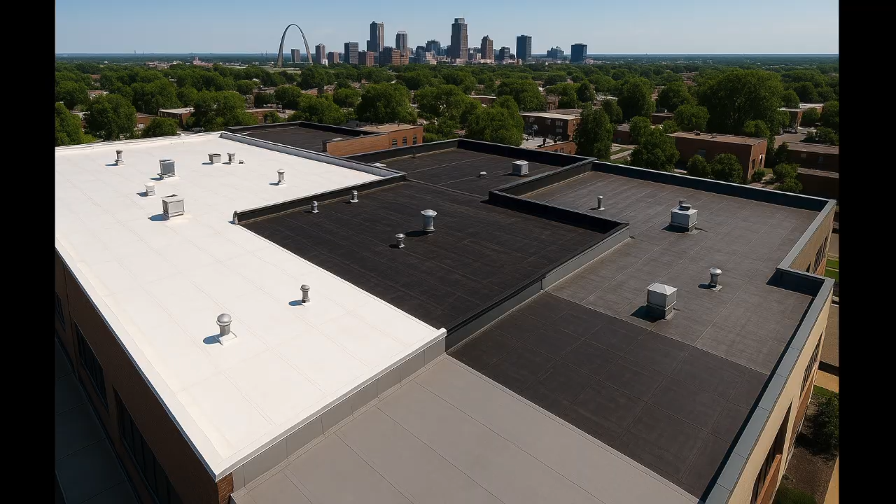Welcome to the Flat Roof Systems training session. In this video, we'll cover everything you need to know to confidently discuss low-slope roofing systems with your clients, from the materials and installation methods to the insulation, accessories, and building code requirements specific to the St. Louis area.

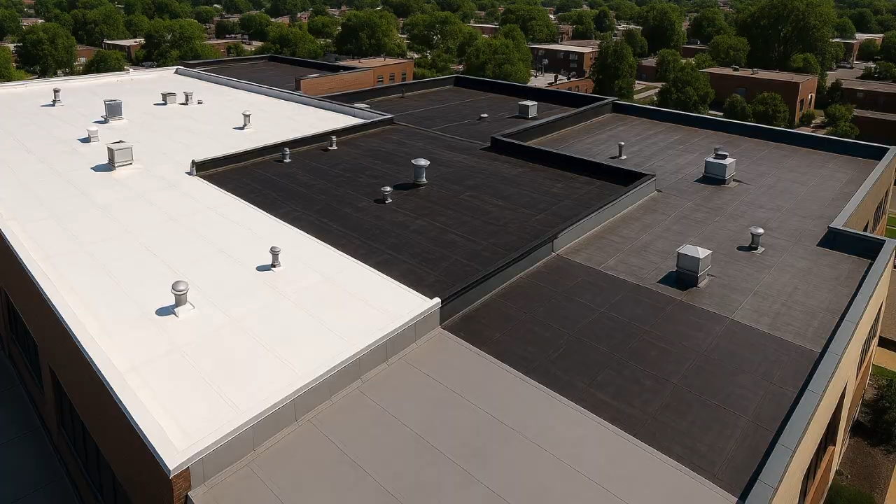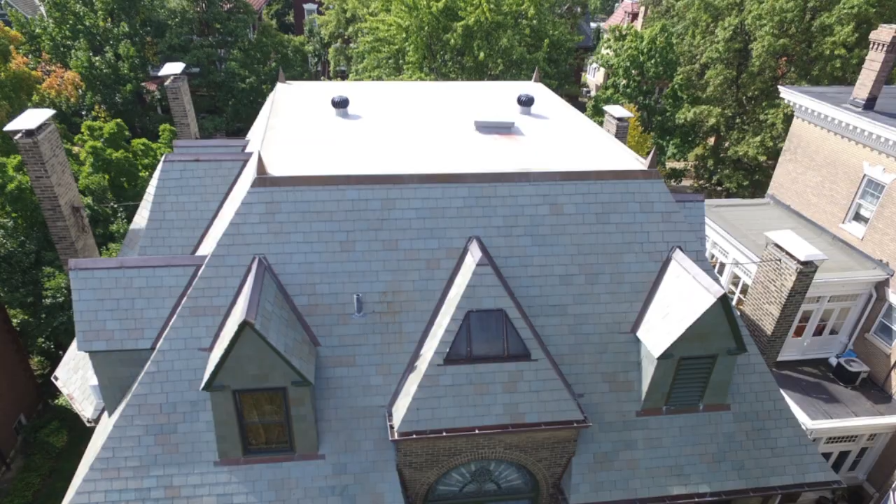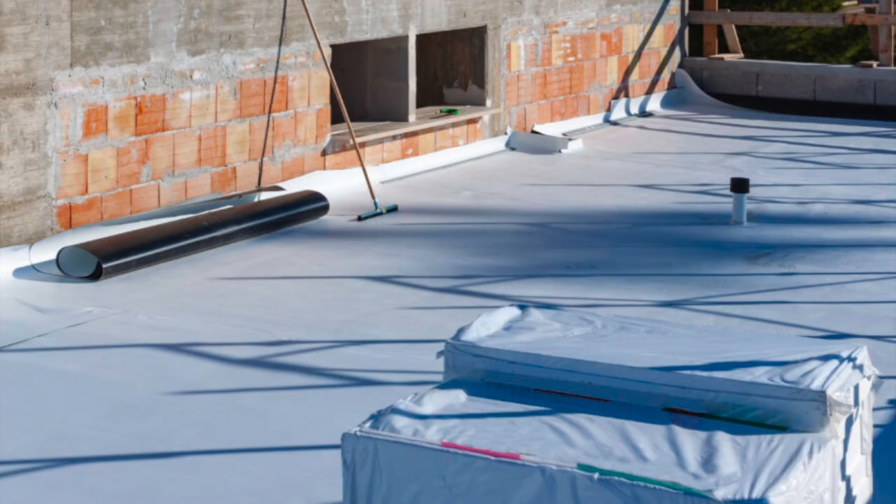Thermoplastic polyolefin, TPO, is one of the most popular commercial flat roofing systems in the St. Louis area. It's a single-ply, white reflective membrane that's energy efficient and helps reduce cooling costs during hot Midwest summers. TPO roofing offers several advantages for property owners in Missouri. It is highly UV resistant, meaning it can withstand prolonged exposure to sunlight without degrading, which helps extend the life of the roof. The material is flexible, allowing it to expand and contract with temperature changes, and it is highly reflective, reducing heat absorption and helping lower cooling costs during hot summer months.

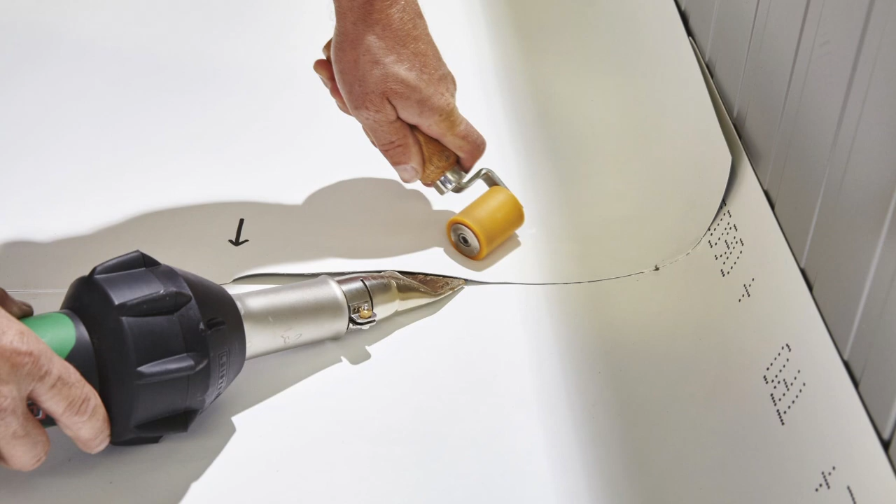However, TPO does have some potential drawbacks. If it is not properly welded or maintained, the membrane can shrink or split over time, particularly during the freeze-thaw cycles common in Missouri's climate. Regular inspections and quality installation are essential to avoid these issues and ensure the system's long-term performance.

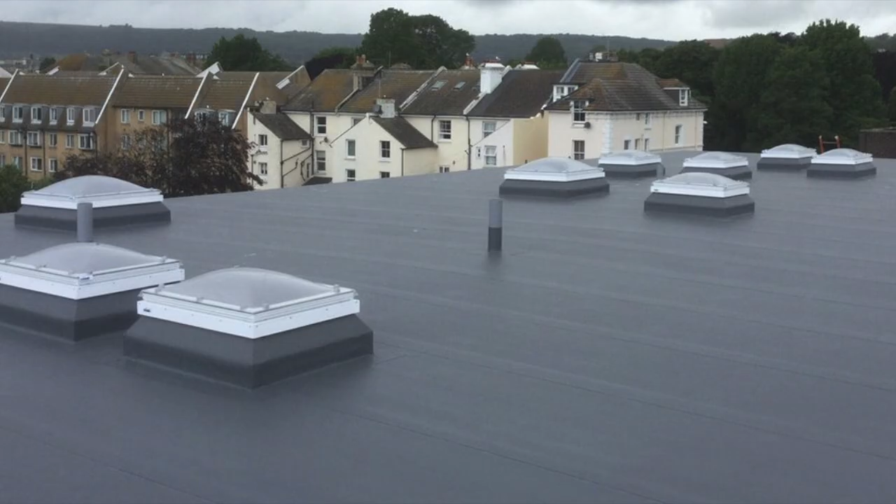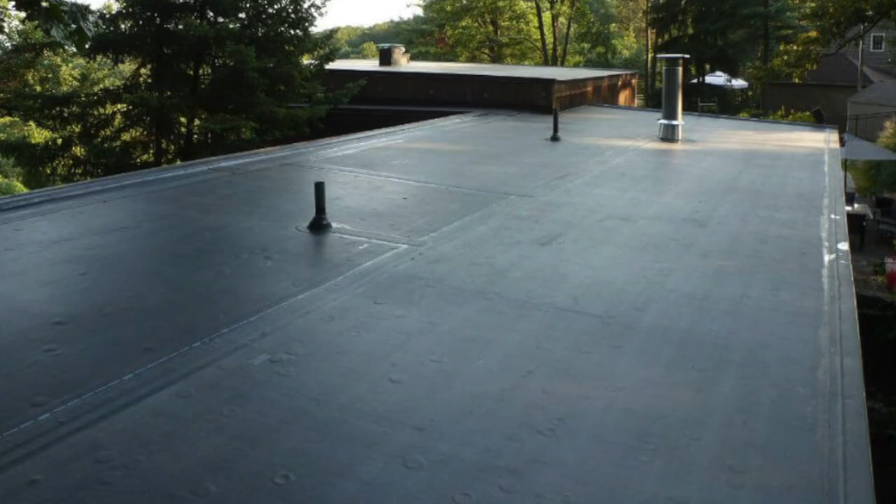EPDM is a black rubber membrane known for its durability and flexibility. It performs well in St. Louis' wide seasonal temperature swings. EPDM roofing is known for its exceptional resistance to UV radiation and ozone, making it one of the most durable and weather-tolerant flat roof materials on the market. Its rubber composition provides excellent long-term waterproofing, ensuring dependable protection against leaks and moisture intrusion for many years.

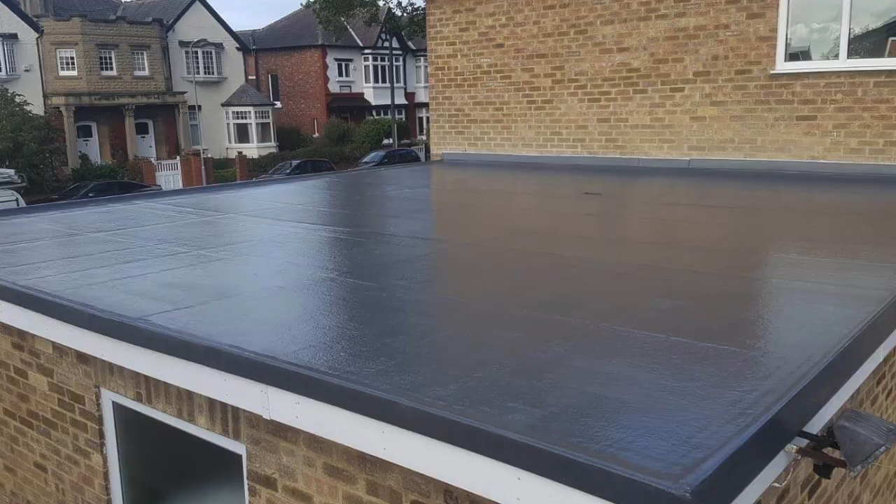However, because EPDM is typically dark in color, it tends to absorb more heat from the sun. This can increase indoor temperatures and raise cooling costs during warmer months, especially in regions like Missouri with hot summers. To counteract this, many installers recommend using reflective coatings or ballast systems to improve energy efficiency and reduce heat absorption.

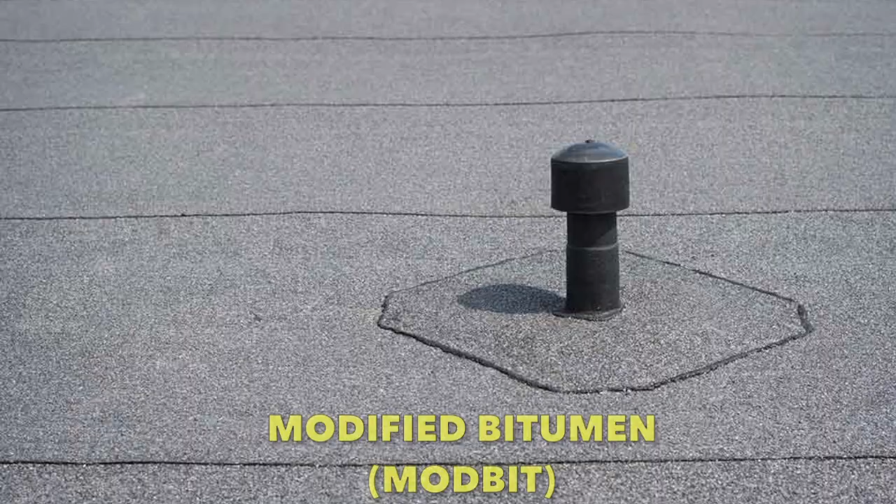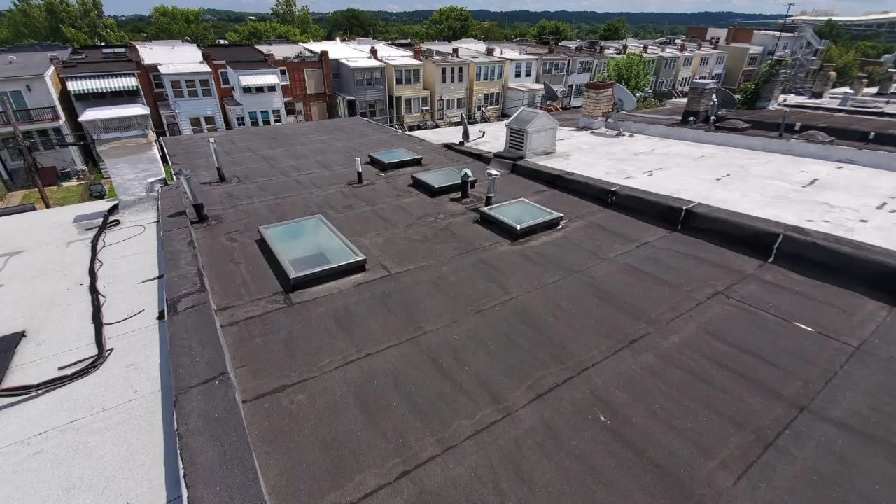Modified bitumen is a time-tested roofing system made up of two primary layers, a base sheet and a cap sheet. It can be installed using torch-down, cold adhesive, or self-adhered methods. Modified bitumen roofing is extremely durable and highly puncture-resistant, making it an excellent choice for smaller commercial buildings and residential low-slope roofs. Its multi-layer design provides exceptional strength and flexibility, helping it withstand foot traffic, hail, and seasonal temperature changes.

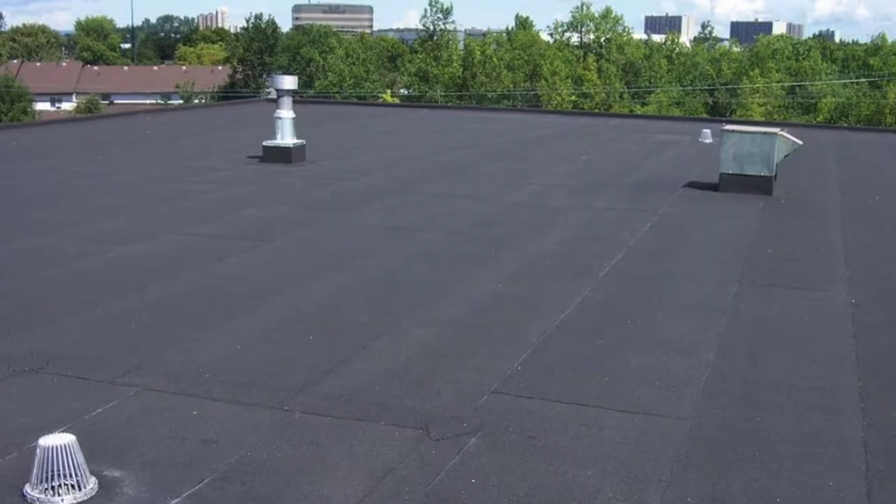However, installation can be labor-intensive, often requiring skilled crews and more time on site compared to single-ply systems. In the case of torch-down applications, the process also demands strict fire safety precautions to protect both workers and the property, which adds to the overall complexity of the installation.

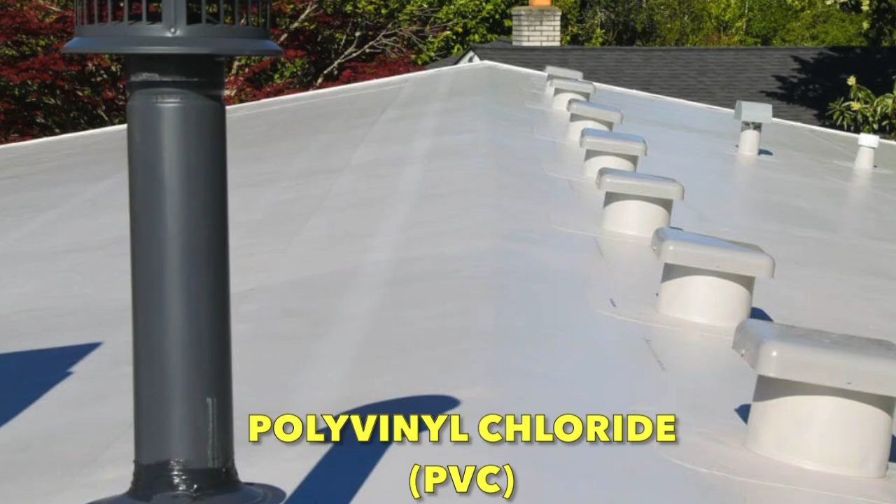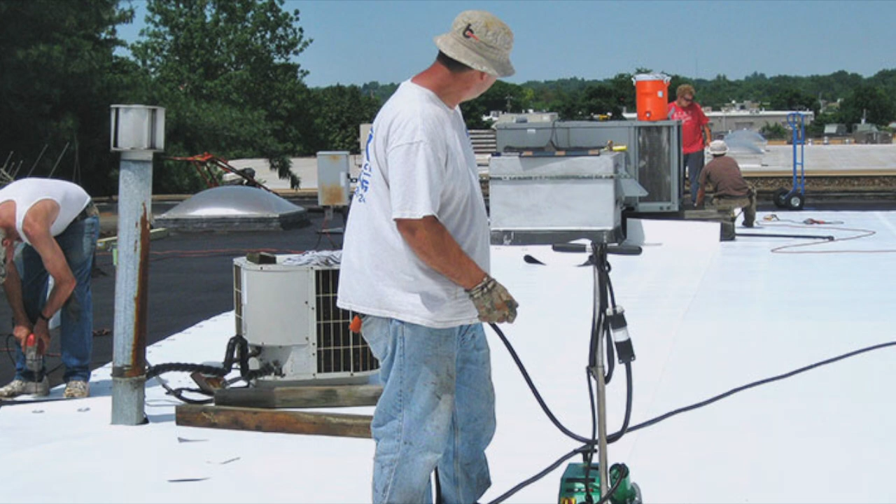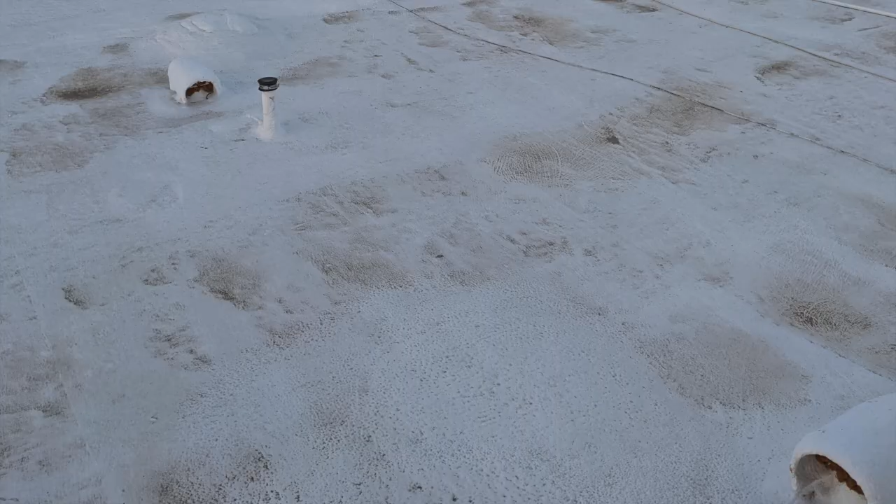Polyvinyl chloride, PVC roofs are similar to TPO but offer greater chemical resistance, perfect for restaurants, factories, or buildings where grease or chemical exposure may occur. Its excellent weldability allows installers to create strong, watertight seams that enhance long-term performance and leak protection. While PVC offers outstanding durability and energy efficiency, it can become brittle with age, especially after long-term exposure to extreme temperatures. Additionally, it tends to be more expensive upfront than TPO or EPDM systems, though its longevity and chemical resistance often justify the higher initial investment.

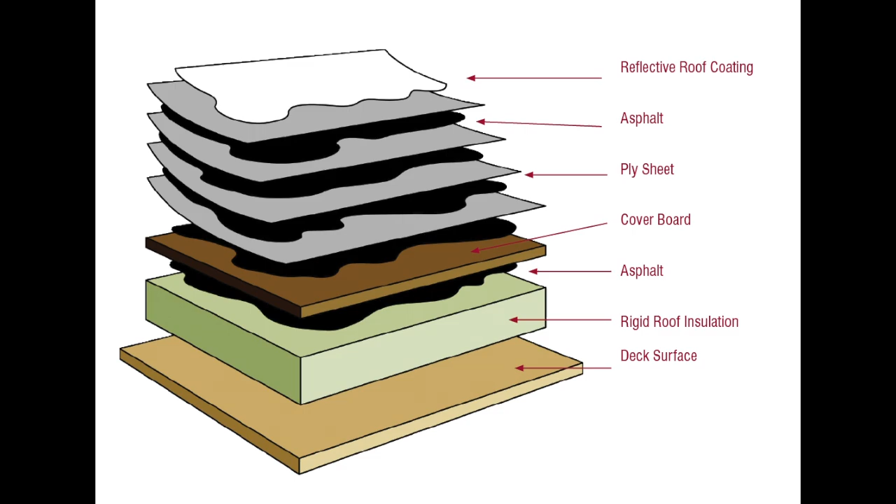The traditional built-up roof uses multiple layers of asphalt and felt, topped with gravel or reflective coatings. Built-up roofing, BUR, systems provide excellent multi-layer protection that delivers long-lasting waterproofing and superior durability. Their layered design makes them highly resistant to foot traffic, making them ideal for commercial buildings that require frequent rooftop access for maintenance or equipment servicing.

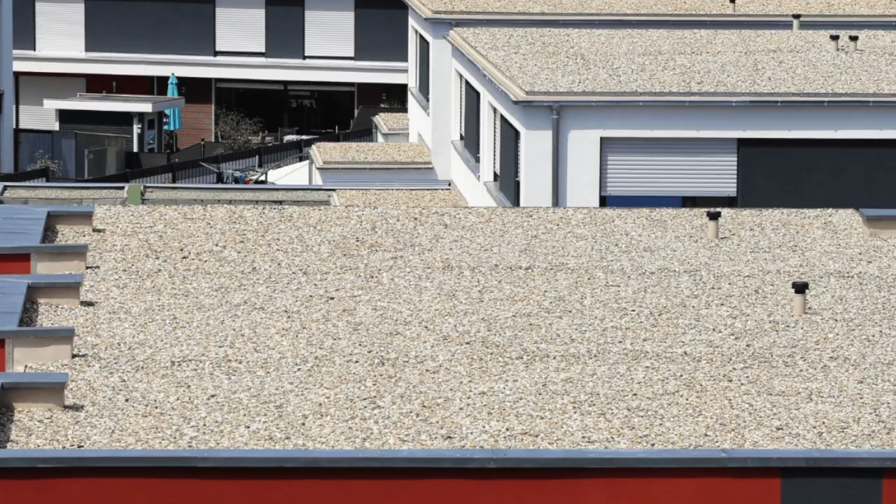However, BUR systems are also heavier than most modern single-ply membranes, meaning they require strong structural support to bear the added weight. Additionally, installation can be messy and time-consuming, involving hot asphalt or tar and multiple layers of felt or fabric, which demands experienced crews and careful handling to ensure proper application.

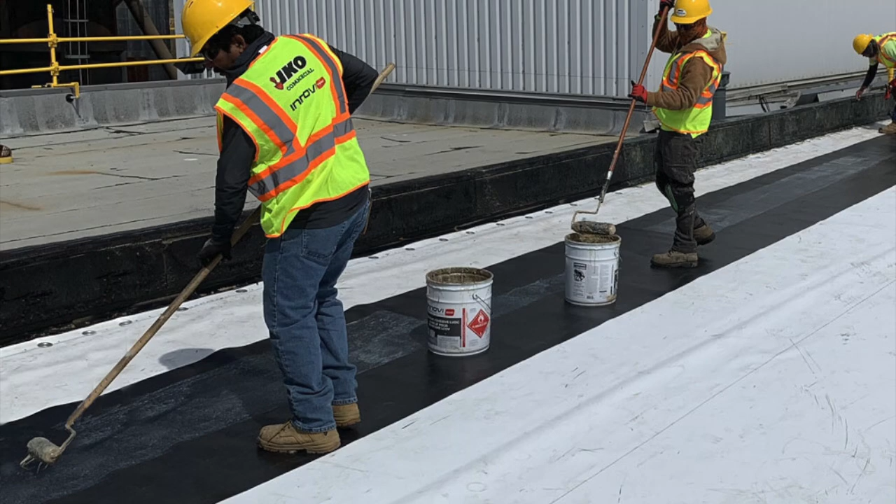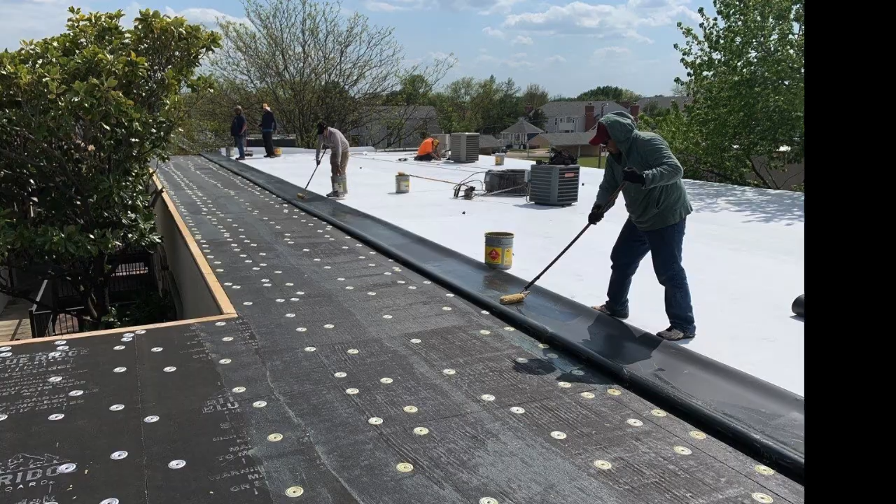There are three main installation techniques involved with these types of flat roof systems, and they differ in their level of complexity, retail price, and final appearance. 1. Fully adhered. The membrane is glued directly to the insulation or cover board using adhesive. Fully adhered flat roof systems provide a smooth, clean finish and offer excellent resistance to wind uplift, making them a preferred choice for buildings in areas with strong storms or variable weather conditions.

However, these systems can be more costly to install due to the price of adhesives, and the cure time required for bonding can extend overall labor time compared to mechanically fastened installations.

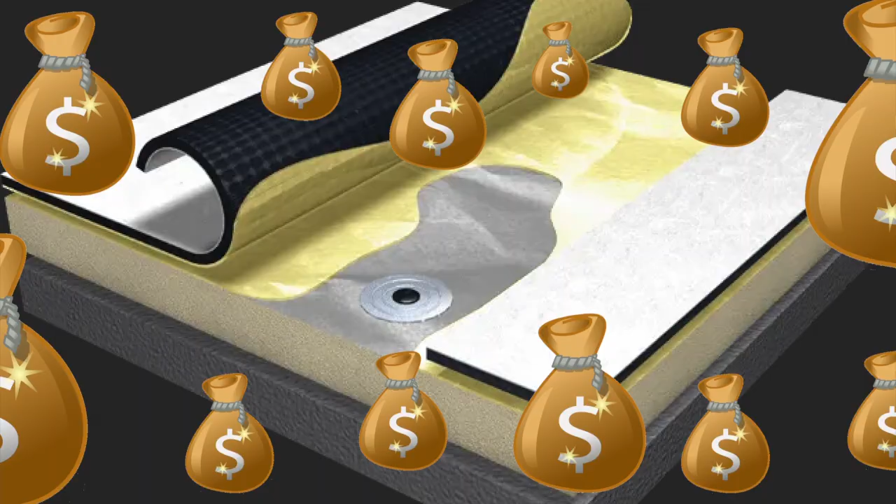TPO, EPDM, PVC, and modified bitumen roof systems can all be installed with a fully adhered technique and execution.

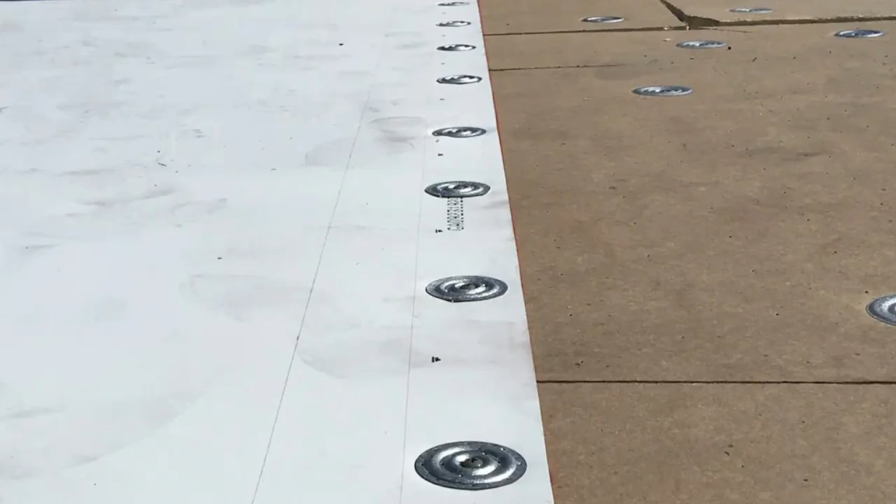2. Mechanically fastened. Sheets are secured using screws and plates along the seams. Mechanically fastened flat roof systems offer faster installation and lower material costs since they don't require adhesives, making them an efficient and economical choice for many commercial projects. However, they can be more susceptible to wind uplift around fasteners and thermal bridging at the metal plates, which may slightly reduce overall energy efficiency compared to fully adhered systems.

TPO, EPDM, PVC, and modified bitumen can each be installed using a mechanically fastened system and execution. However, modified bitumen is rarely installed in this manner, and fully adhered systems for it are preferred.

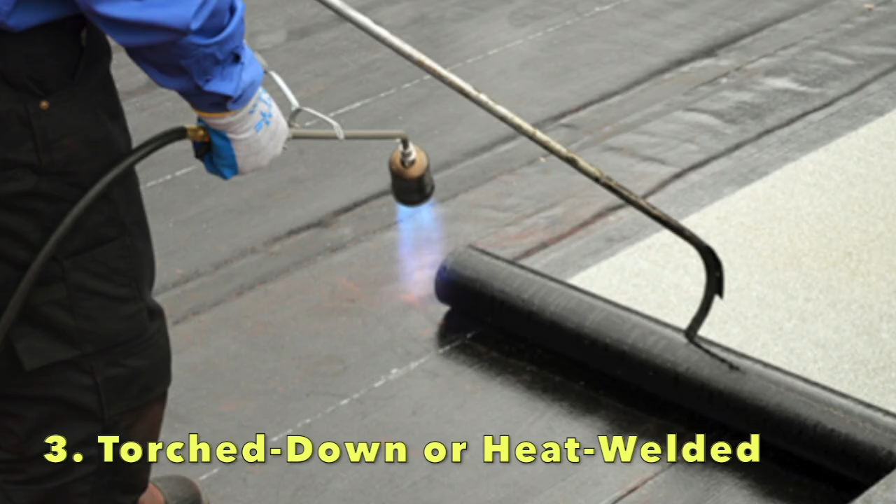3. Torch down or heat welded, used for modified bitumen and some single-ply systems. Torch down roofing creates a strong, seamless bond between membrane layers, resulting in a highly durable and watertight flat roof system. However, this method requires the use of an open flame, which means it must be performed by trained professionals to ensure safety and prevent fire hazards during installation.

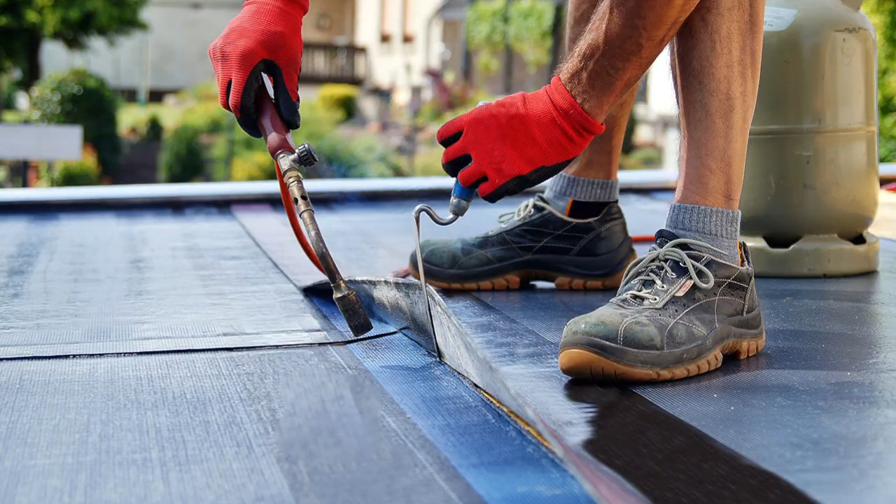Heat welding uses specialized tools, including a hot air welder or robotic welding machine, to fuse overlapping seams of single-ply membranes such as TPO or PVC. The process involves directing controlled heat between the layers until the material softens, then pressing them together with a roller to form a seamless, watertight bond.

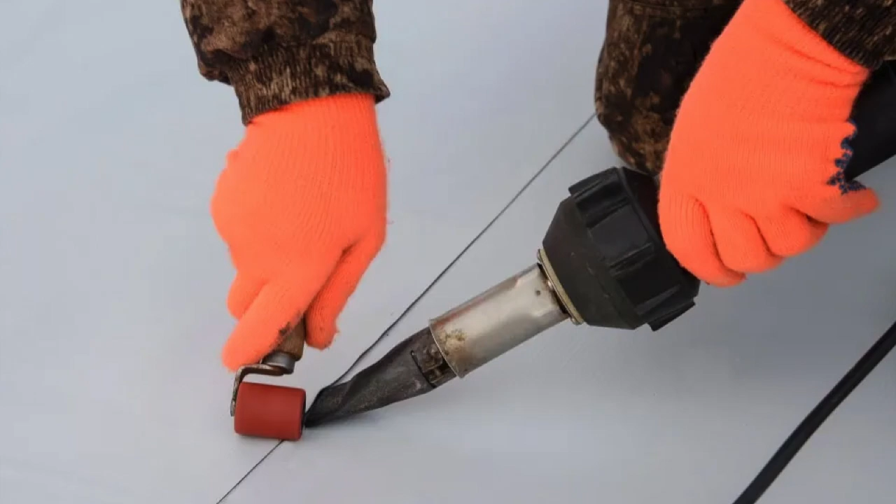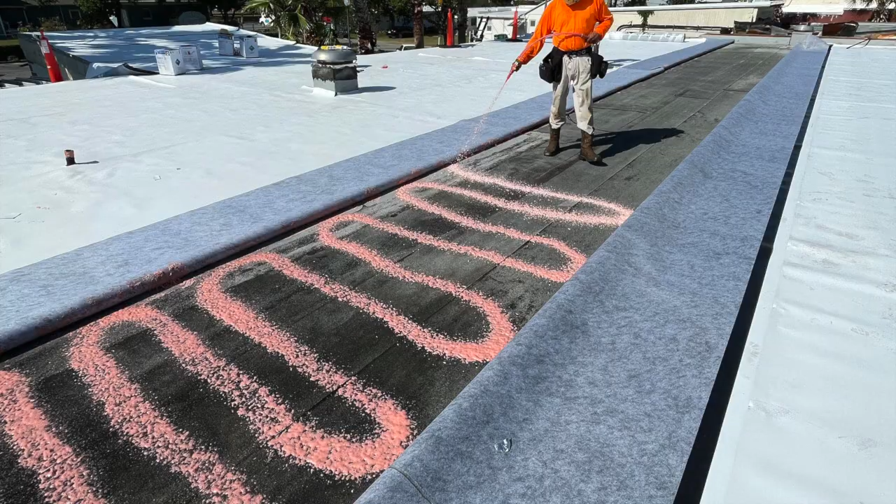You should also be aware of a product modification for TPO, EPDM, and PVC, which is also available. These products can be available in what is called fleeceback. Fleeceback roofing is a type of single-ply membrane which has a fabric or felt-like fleece layer laminated to the underside. This fleece layer provides extra cushioning, strength, and adhesion surface, allowing the membrane to be installed over rough or existing roof surfaces using low-rise foam adhesives instead of traditional glue or fasteners.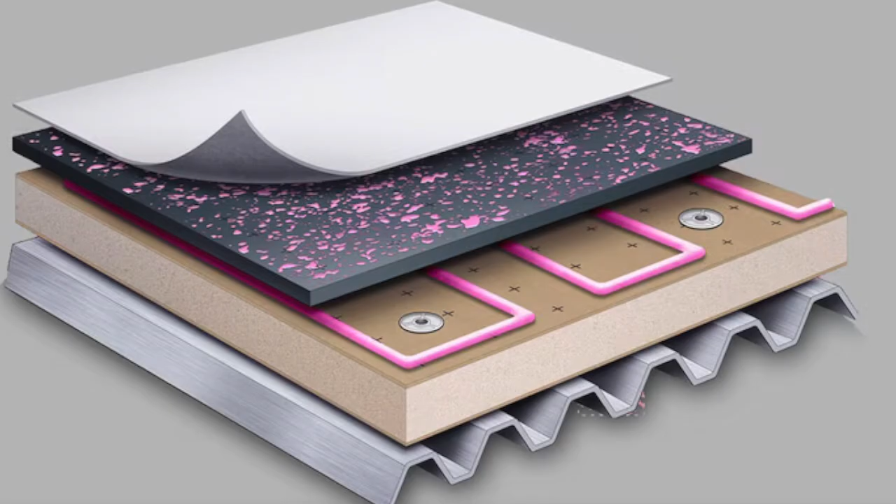Fleeceback systems are especially popular for roof recover projects as they help smooth out minor deck imperfections, improve impact resistance, and offer additional thermal and sound insulation while maintaining the durability and flexibility of the base membrane.

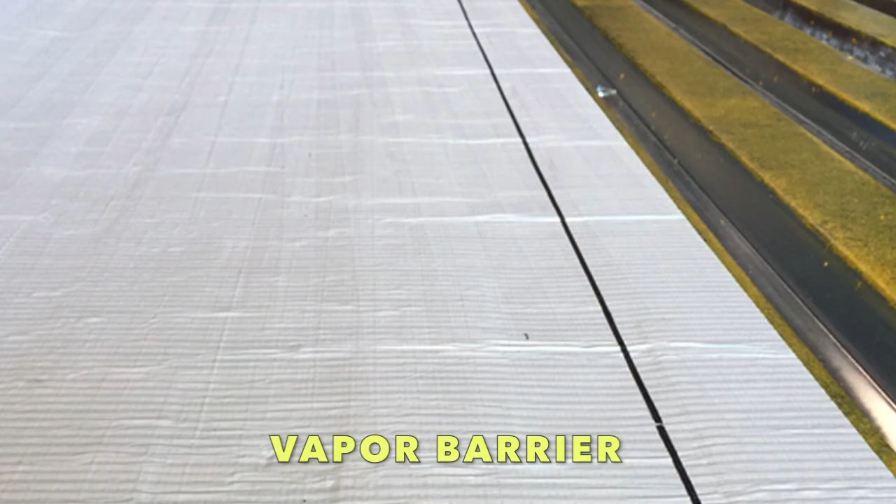Every flat roof assembly is built from the bottom up. Substrate, usually wood decking or metal decking. Vapor barrier helps control moisture movement. Insulation board, commonly polyiso, chosen for its higher R value. Cover board, such as DensDeck or fiberboard. Lastly, the membrane is installed to the top of the assembly. In the case of modified bitumen, a base sheet is first installed before the cap sheet. The cap sheet is the granuled layer exposed to the elements.

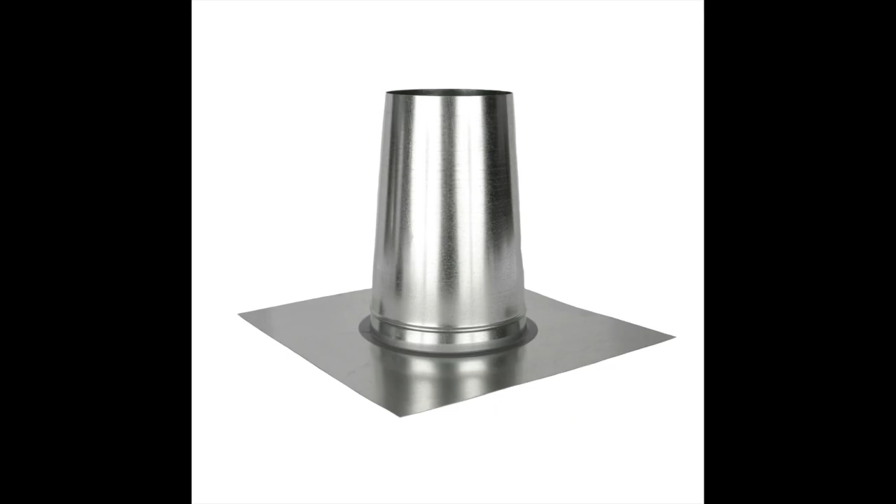To have a better understanding of the layers and accessories of a flat roof system, let's go over the purposes of some of the layers, as well as some of the other seam and flashing accessories required for a finished and warrantable roof system. Polyiso insulation boards provide high thermal resistance, or R value, which measures how well the material resists heat flow. The higher the R value, the better the energy efficiency. Roofers often mix insulation thicknesses, such as 1.5-inch and 2-inch boards, to achieve the required R value in slope design.

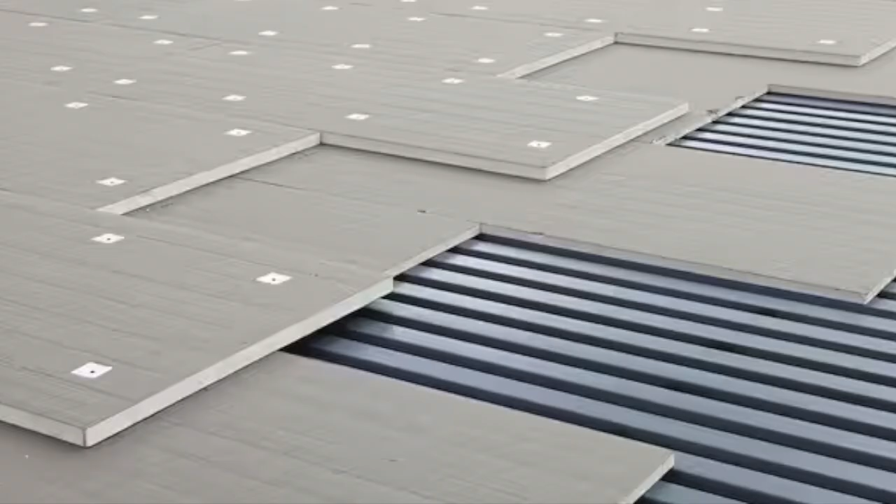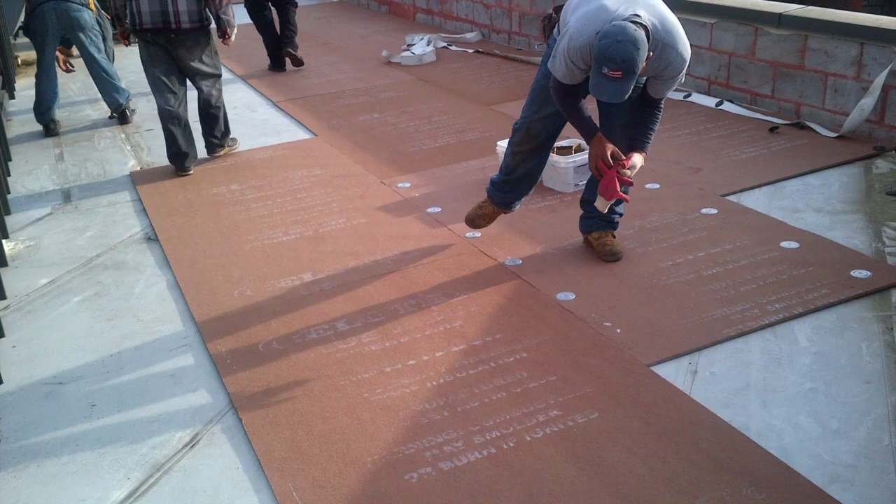Cover boards like DensDeck and fiberboard protect the insulation from damage and create a smooth surface for adhesion. DensDeck is denser and works well with fully adhered systems. Fiberboard is lightweight and budget-friendly, but may not perform as well under torch down or solvent-based adhesives.

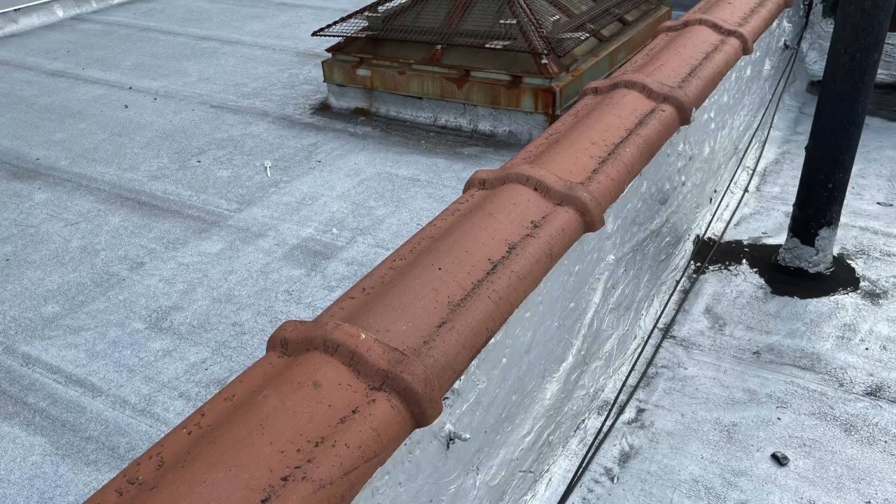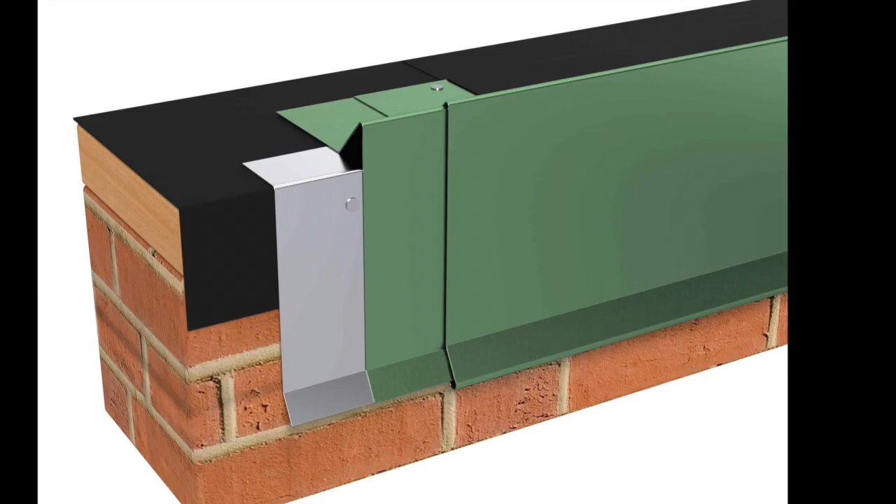A parapet wall is the vertical extension of a wall above the roofline. Flat roofs are usually installed up and over parapets, then capped off with coping metal to prevent water intrusion. If no parapet exists, roofers must either build one up to meet local code or use an accessory called a gravel stop, which prevents water from rolling over the edge. In some cases, a custom gravel stop must be fabricated to meet the specific code height requirements.

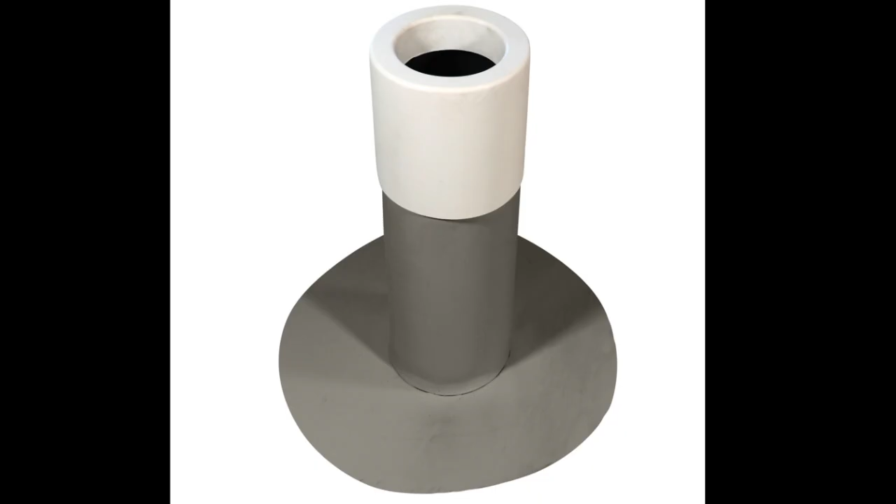Flat roof systems include numerous accessories that complete the waterproofing assembly. A proper pipe jack boot is essential for keeping a flat roof watertight around pipe penetrations. It flexes with the roof membrane to prevent cracking and seals tightly to stop leaks. Using the correct material, TPO, PVC, or EPDM, ensures a secure bond and protects the roof deck from moisture damage and costly repairs.

T-joints. Proper T-joint treatment is crucial because it seals the intersection where three membrane sheets overlap, a common weak point for leaks. Applying a T-joint patch ensures a smooth, watertight seal that prevents water from pooling or seeping through seams.

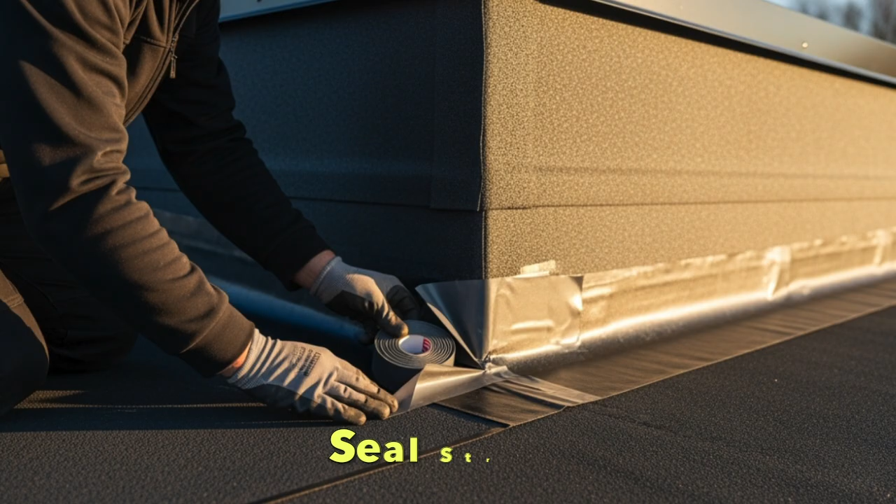Seal strips. Seal strips protect fastener lines and exposed seams on mechanically fastened roofs. They cover screw rows to block moisture and UV exposure, improving wind resistance and extending the roof's overall lifespan.

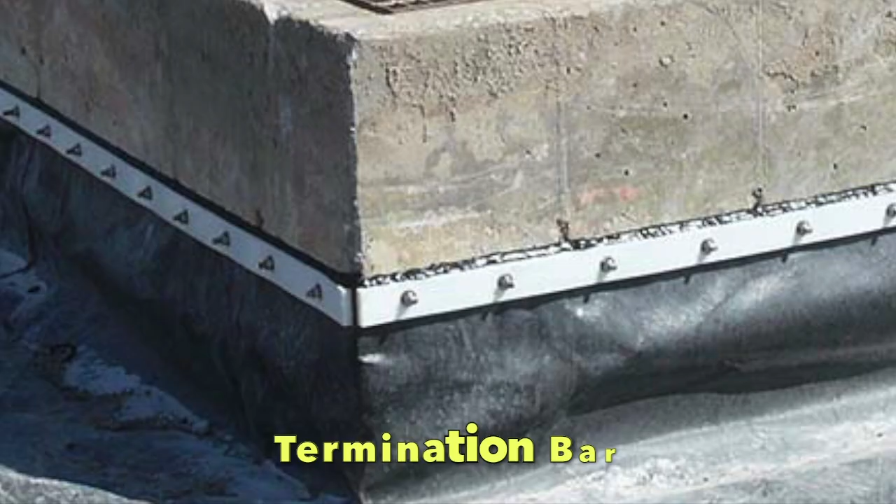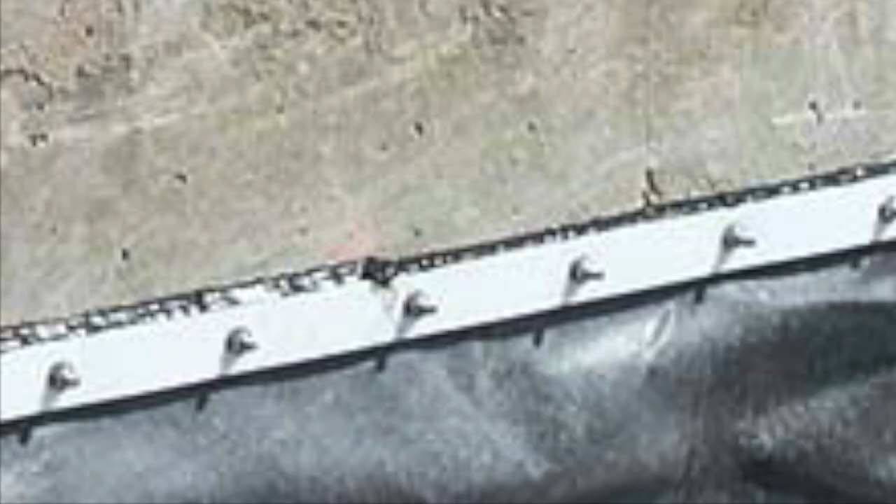A termination bar is important because it securely anchors the top edge of a roof membrane where it ends against a wall, parapet, or vertical surface. It keeps the membrane from pulling loose over time and prevents water from getting behind the system. When sealed properly along the top edge, the termination bar ensures a tight, watertight finish, protecting vulnerable transitions and extending the life of the entire flat roof system.

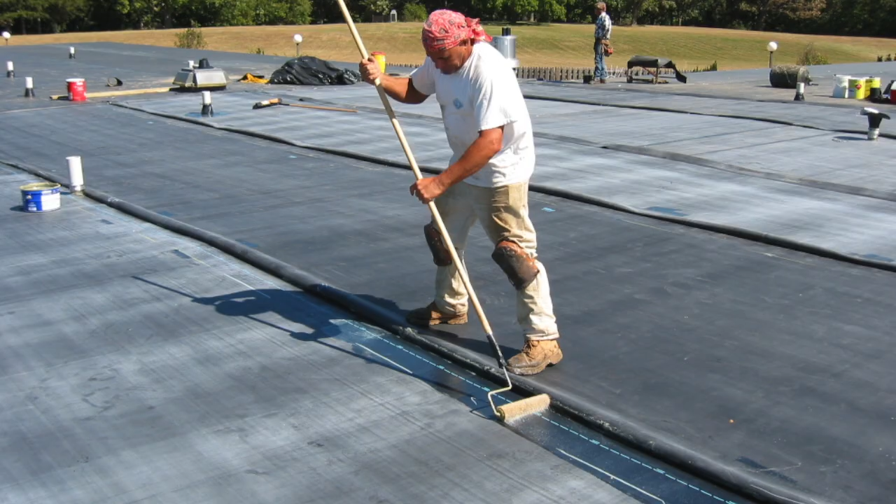Adhesives and sealants are essential for bonding roof components together, such as membranes, insulation, and coverboards. They create a smooth, secure surface without mechanical fasteners, helping improve wind resistance and waterproofing. Using the right adhesive, whether solvent-based, water-based, or low-rise foam, ensures proper adhesion and long-term performance under changing temperatures.

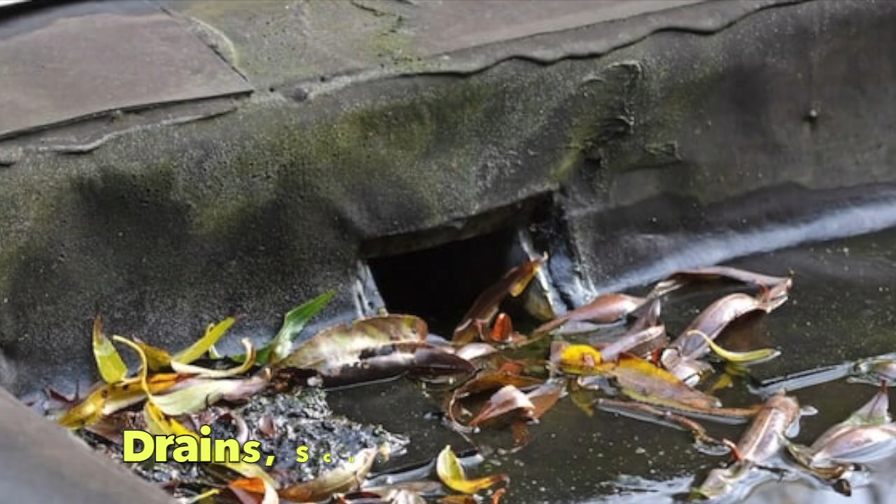A vapor barrier is vital in flat roof construction because it prevents warm, moist indoor air from migrating upward and condensing beneath the roofing system. Installed directly over the roof deck, it protects insulation and structural components from moisture damage, mold growth, and loss of thermal efficiency. By controlling condensation, a properly installed vapor barrier helps maintain the roof's long-term durability and energy performance, especially in climates with wide temperature swings like those in the St. Louis region.

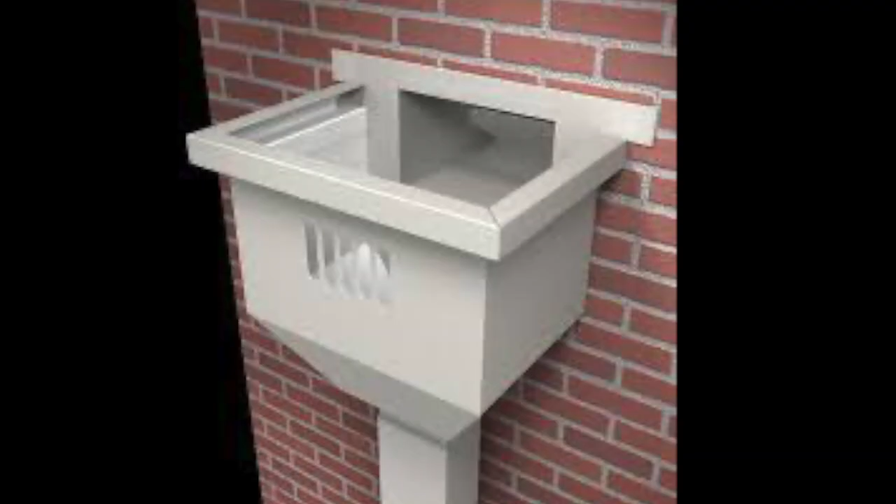Proper drainage components are essential for keeping flat roofs free of standing water. Drains are installed at the roof's low points to funnel water into the internal plumbing system. Scuppers allow water to exit through parapet walls, serving as either primary or overflow drainage points. Collector boxes, mounted outside the wall, catch water from scuppers and direct it into downspouts or gutter systems. Together, these components ensure efficient water removal, prevent ponding, and protect the roof membrane and structure from premature deterioration.

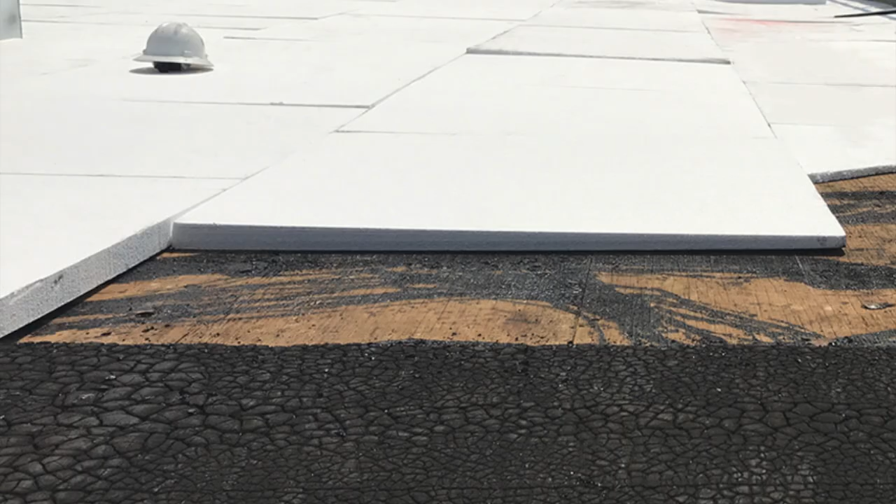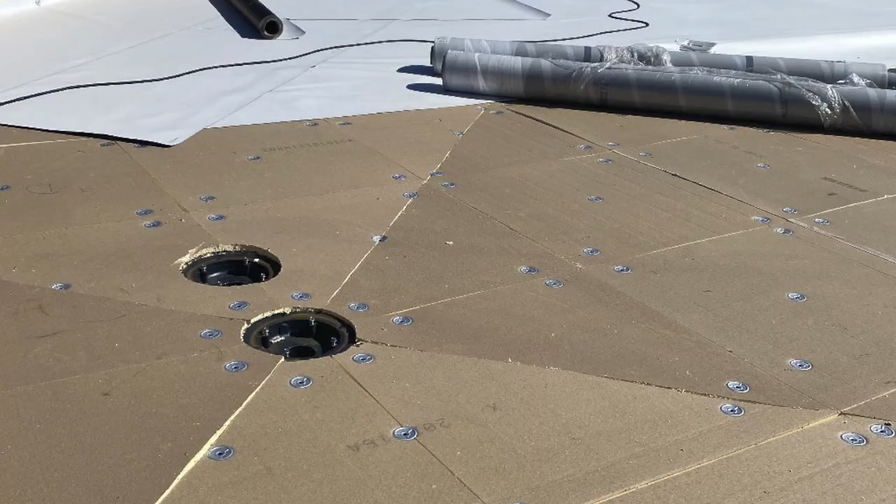Even though we often call them flat roofs, a truly flat roof would hold water indefinitely. Standing water leads to premature membrane breakdown, leaks, and even structural damage over time. That's where tapered insulation systems come in. A tapered system is designed to create positive slope, guiding water toward designated drainage points, like internal drains, scuppers, or gutters, so that no water remains on the roof surface for more than 48 hours, as required by building code.

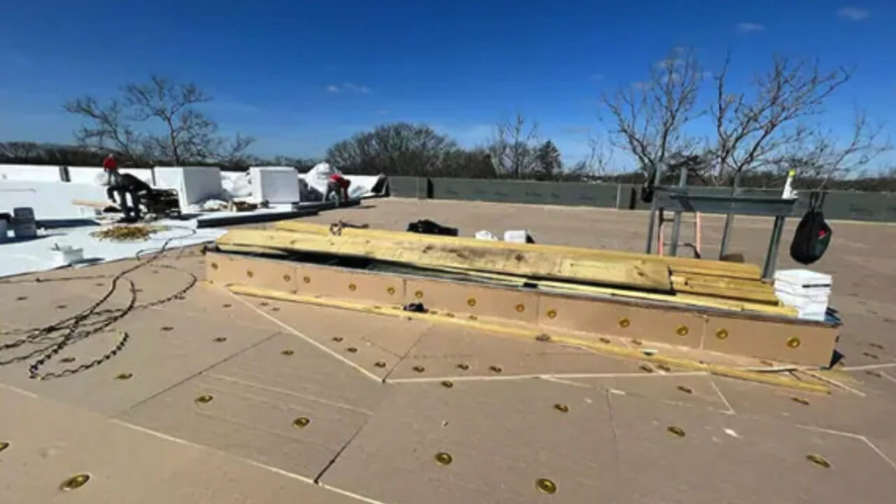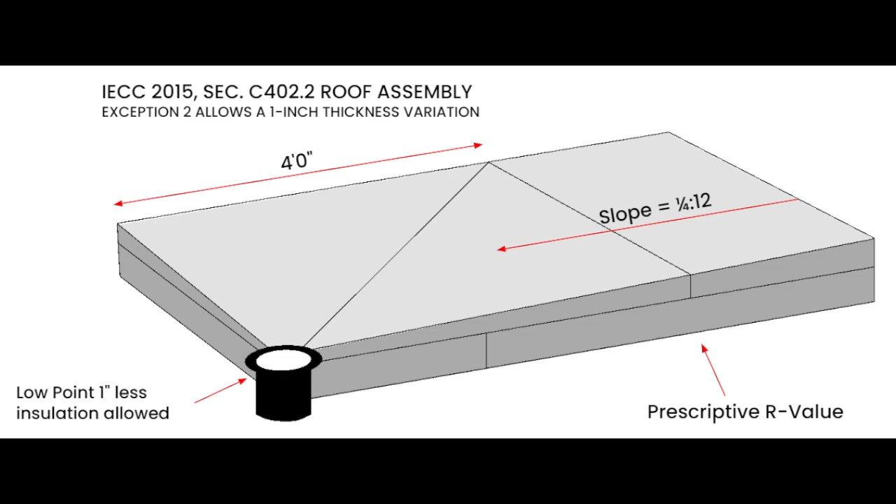Most tapered systems use polyiso insulation boards that are precision cut into angled sections, usually 4 feet by 4 feet. Each panel increases or decreases in thickness to form a gentle slope across the roof surface. The slope is typically designed between 1/8 inch to 1/4 inch per foot, depending on building code, roof size, and drainage layout. 1/8 inch per foot is the minimum slope permitted by most commercial roofing codes. 1/4 inch per foot provides faster drainage and is often used in high rainfall areas or complex roof designs.

Material options. There are two main materials used for tapered systems: polyiso and EPS, expanded polystyrene. Polyiso is the most common choice because of its high R value per inch. It's lightweight, easy to cut, and integrates seamlessly with other roof insulation layers. EPS, on the other hand, is more affordable and ideal for creating complex slopes or large fill sections. It's made from the same type of foam used in coffee cups, giving it excellent dimensional stability and resistance to moisture absorption. However, EPS is more chemically sensitive. Many solvent-based adhesives can eat through it. Engineers or roofing manufacturers can assist in creating a taper layout plan that meets both slope and insulation value requirements.

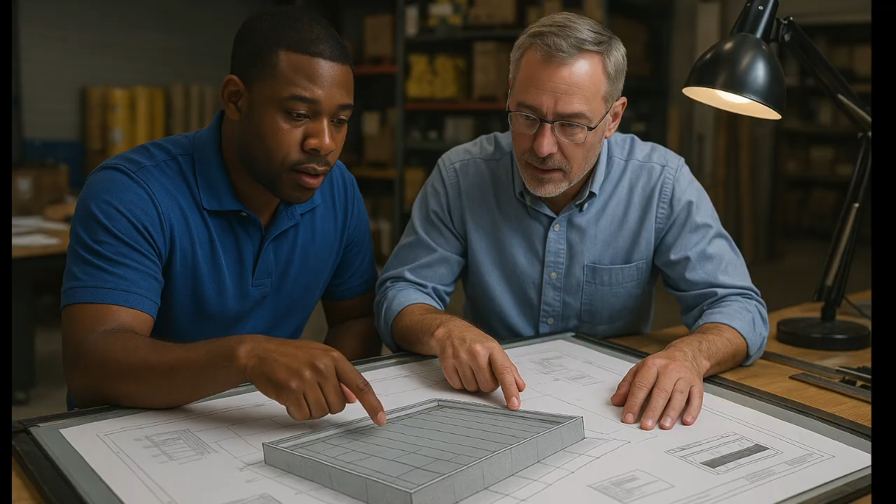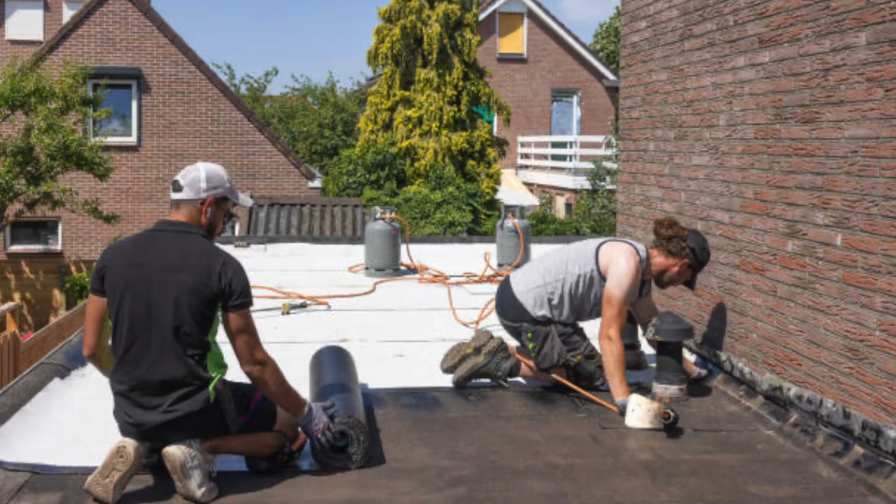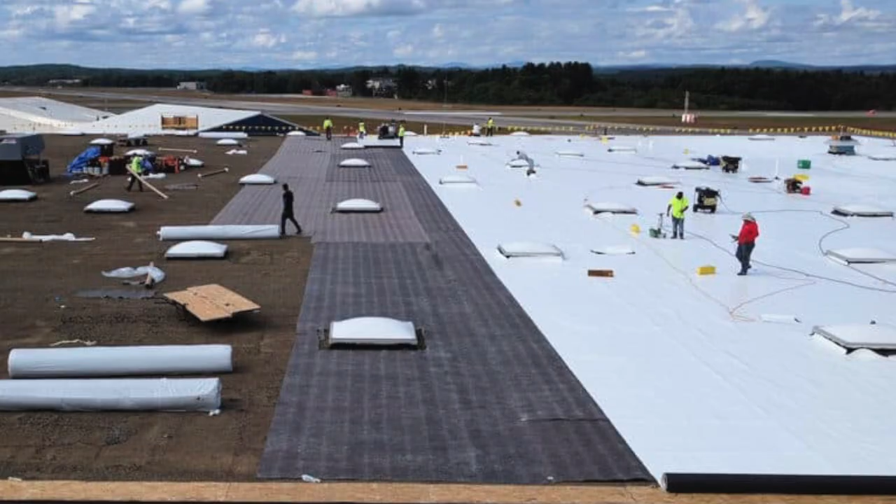Flat roofs can be fully removed and replaced, but in some cases, an overlay installation is a cost-effective option. If the existing structure is sound, installers can add a new coverboard, membrane, and accessories over the old system. However, factors such as door thresholds, rooftop patios, or HVAC curb heights may make overlays impossible. Always consult your production manager or leadership team before recommending this to a client.

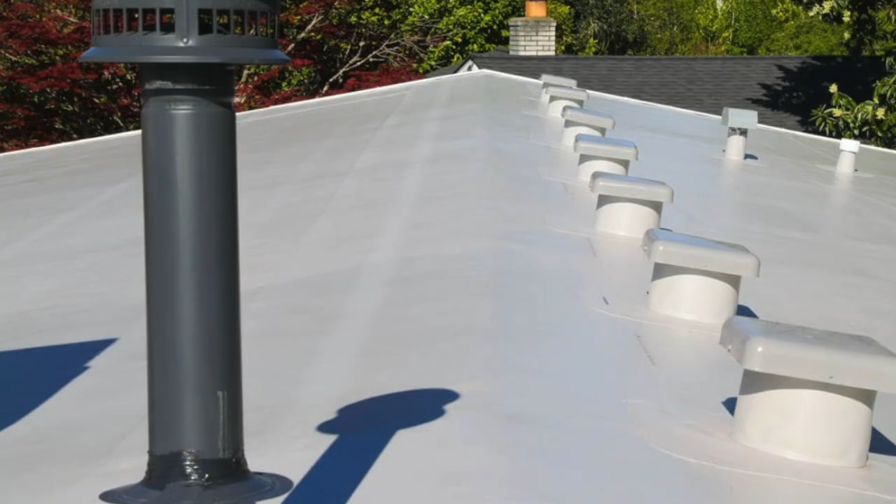Flat roof systems are a vital part of commercial and multifamily roofing in the St. Louis area. As a sales professional, your goal is to educate property owners about their options, benefits, and code compliance. If you're ever unsure about the technical requirements, consult your leadership team. And remember, accurate information builds credibility and trust with your clients.